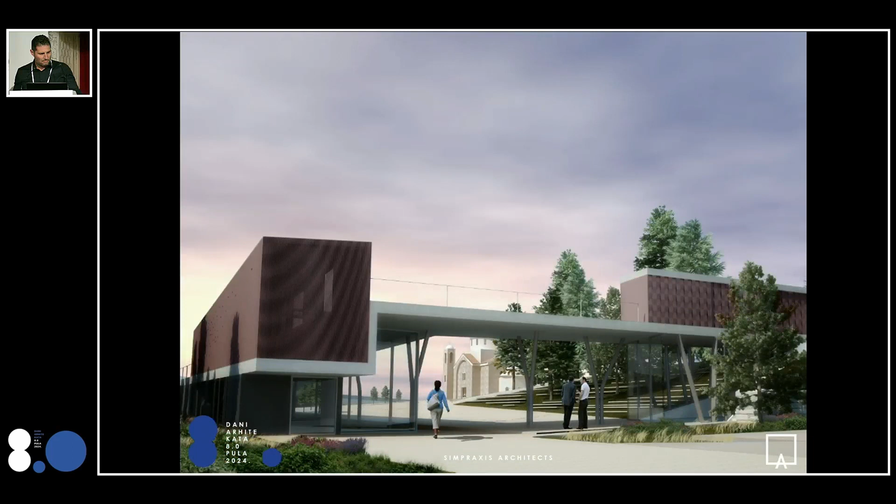This is some competitions we won.

So what's the role of the architect? I think we can stay here and discuss for days, and maybe we'll not be able to analyze it and define it.

Simply, I would say that the architect should be the maestro, the coordinator of a project. Everything should go through him, with all the specializations that exist today. We cannot know everything, it's impossible, but what we can do is coordinate the specialists.

We've seen so many interesting presentations from the sponsors about doors, about lighting. Our role is to coordinate these people and use them in a good way to get the maximum of their knowledge, their know-how, and incorporate it into a big puzzle, which is the project.

The way we manage these people, all this knowledge coming together, it's going to be an interesting result. So the architect should hold the role of the maestro.

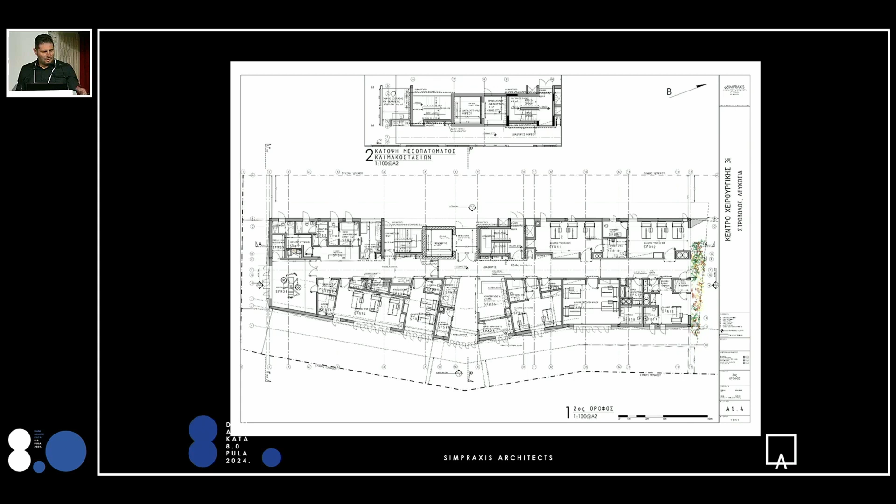So we did all the basic drawings, all the discussions with the authorities, and we prepared, negotiated, and applied for all the necessary permissions. It's a lot of bureaucracy, especially for medical buildings in Cyprus. You have to get a license from the Ministry of Health, then go back to have all the electromechanical done, then apply for the planning permissions, go through the fire brigade, the municipalities, environmental departments. It was a lot of bureaucratic back and forth.

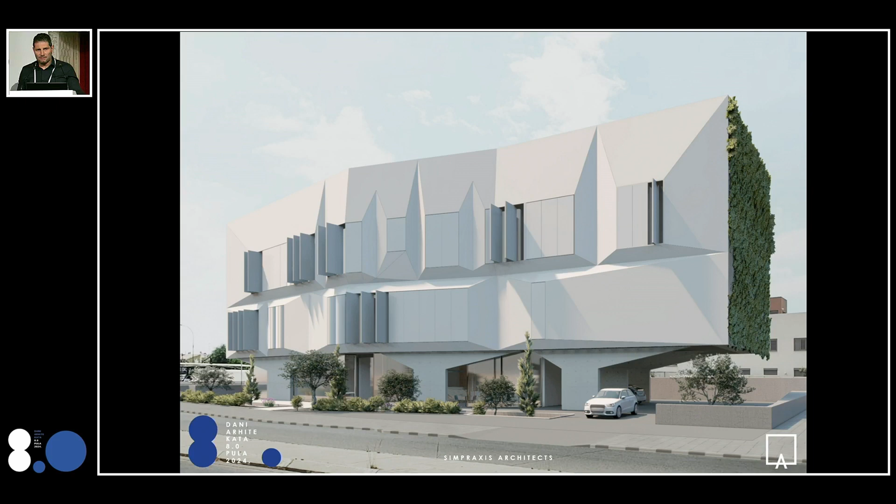In the end, we created the images and some promotional information for the client. The project was on hold for about a year until we got all the permissions and until an investor would come in.

As soon as the project was mature and attractive, we found an investor. The client found an investor through some of the big five audit firms, I think it was Coopers and Lybrand, and they helped him find an investor. A medical fund was created, and then we got the go-ahead to proceed with the detail and tender drawings.

Our role there was to coordinate all the consultants. We had to get back all the consultants' drawings and specifications and incorporate them into our drawings, making sure there were no conflicts.

As I said before, we did the design concept and all the detailed drawings. We coordinated and negotiated and acquired all the permissions, and we prepared with the QS the bill of quantities and went out on tender. In Cyprus, I have to mention that we use the British system, the construction law and the British system, so we have quantity surveyors, we have bills of quantities, and we go out on tender with that.

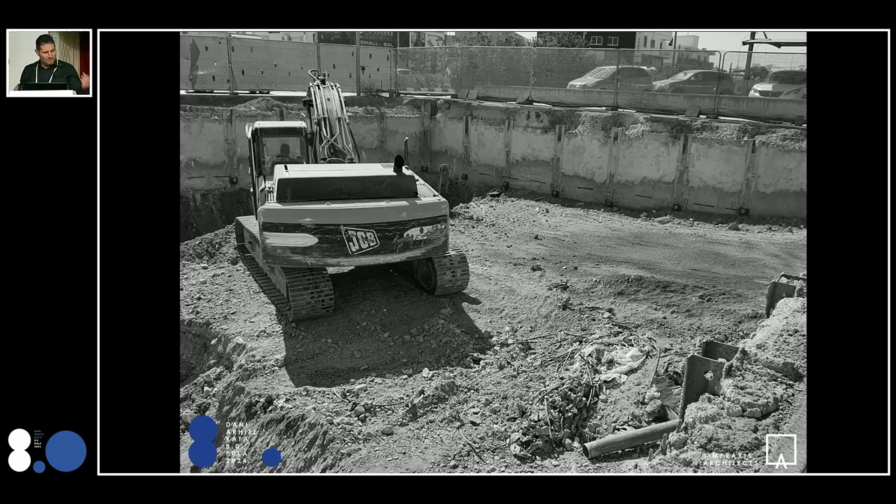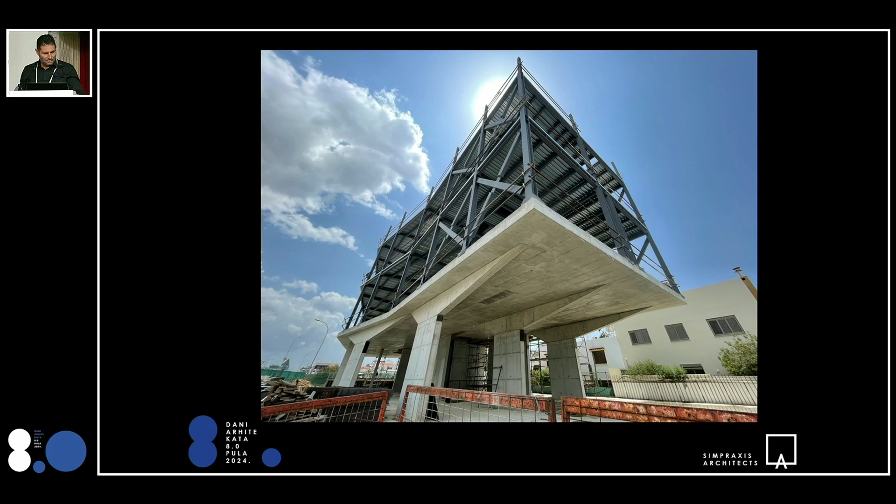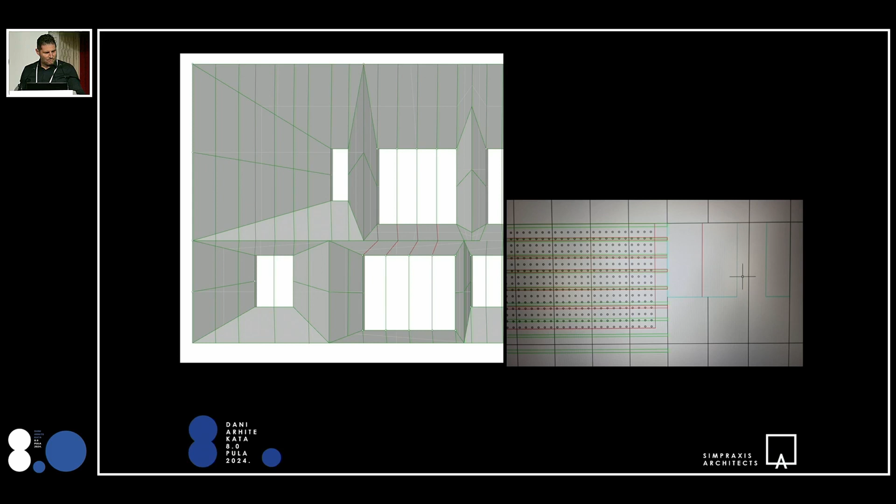These are some photos during the structure erection. The building is concrete up to the ground floor, and then it's a steel structure. This is some drawings we did with studies for the facades, and this is the back facade of the building. We used HPL, high pressure laminate, from Abet Laminati, an Italian brand.

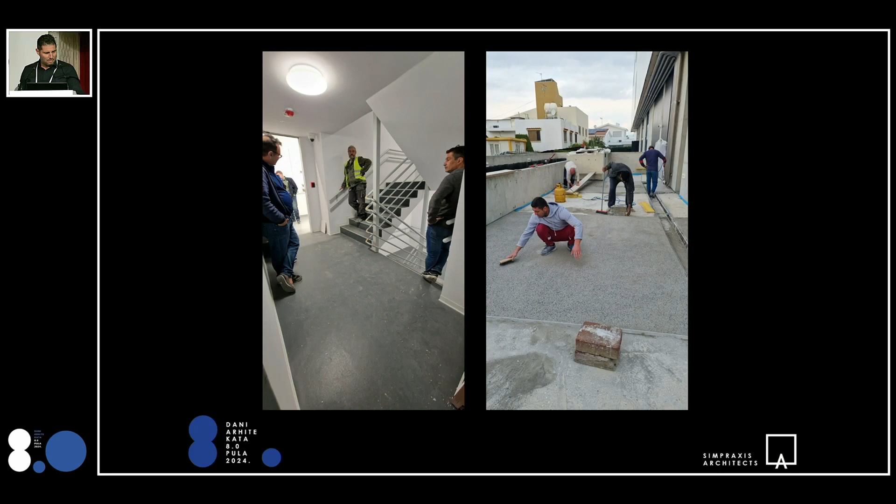Okay. So I just missed it. It's not changing. Yeah, oh, okay.

I'll just highlight some main points on the private projects. We use a different contract, as I said before, the JCT. On private contracts, architects can specify brands and specific materials. I was listening before to some of the sponsors talking about specifications.

It's a completely different ballgame doing a public building versus a private building. You have the flexibility in a private building to do changes, subject to being in budget, and you can justify the changes at any point - you can go ahead and do that. The architect should coordinate the whole team of consultants, and all the contract administration is through the architect.

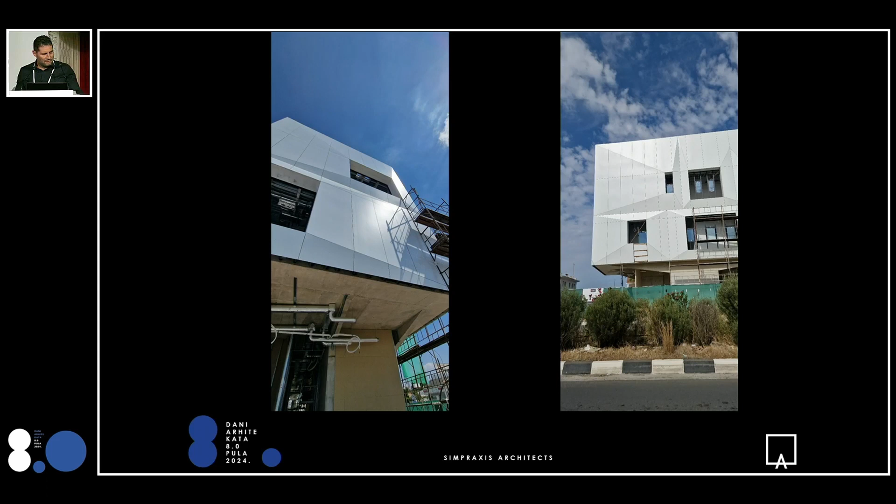This is some photos from during the construction phase. And this is a photo of the building with all these openings there. We had them, it was before the installation of the fins, which, the end result is like this.

Everything closes. It's a daycare unit, so basically it closes at 5, 6 o'clock in the afternoon and opens up the next morning. It was a niche market. It's a very high-end OR, operation rooms, for surgeries like plastic surgeries, ophthalmology cases, orthopedic cases that you can do in the morning and then go home in the evening.

So we wanted the facade to show this, to be able to close off. The whole building can close off in the evening, and this is with the fins open.

Okay, now I'm going to move to the public building. It was a competition. Paphos is a city, as I said before, it's a city on the west coast of Cyprus. It was the cultural city of Europe in 2017.

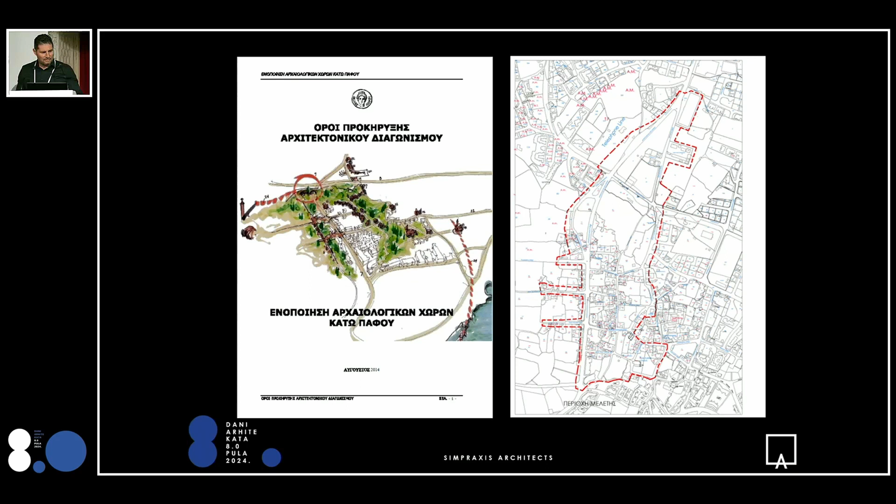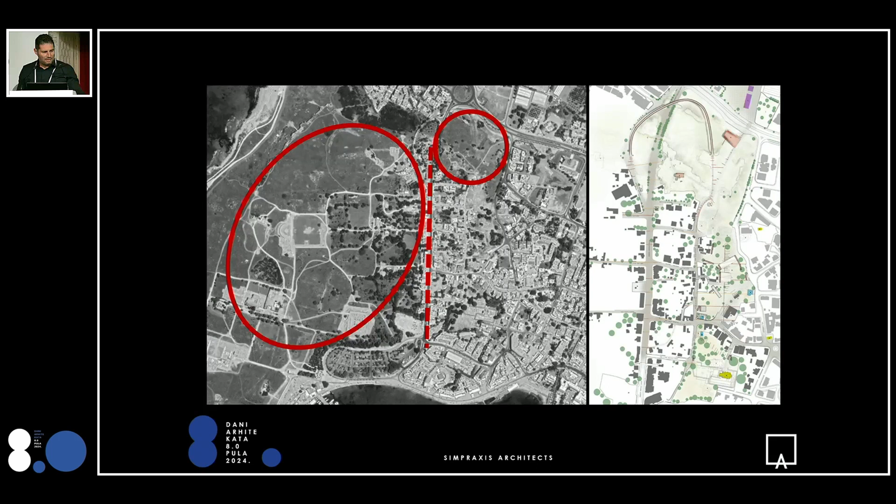The area is a big area, a big urban site in the city of Paphos. And in the circle is the two archaeological main parts, and the dotted line is the main road now dividing this archaeological site. So we came up with the idea of creating a loop.

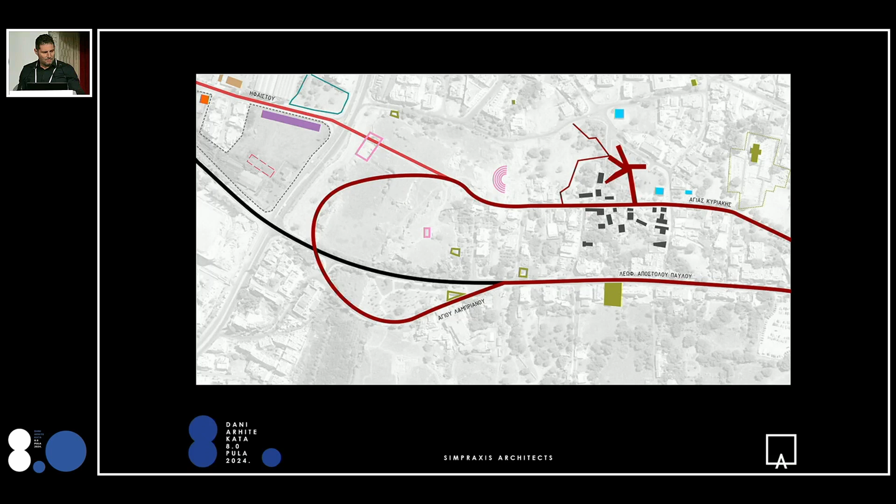As you can see, we created a loop to join this site again. And it was also, the brief called for some hard landscaping, some facilities to use like exhibition centers and resting places and spaces, etc.

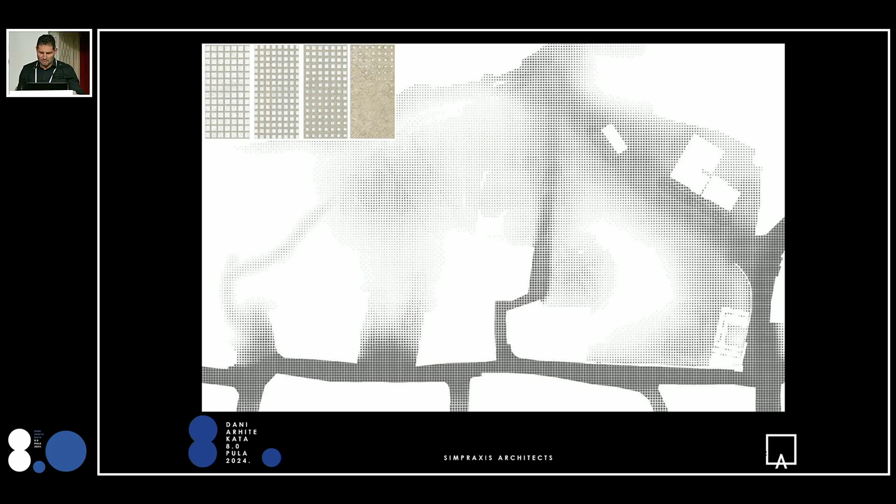So talking about our role here, the brief was ready before. We didn't have any involvement in the brief, just to compare with the private project. And as soon as we won the competition, we were appointed as the architects. Those are some images from the competition phase.

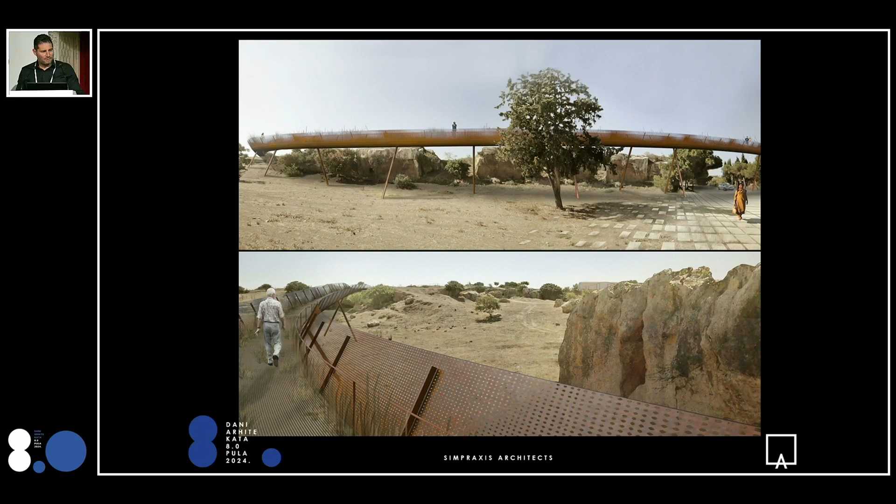We were appointed as architects by the municipality, and the structure compared to the private project was that the client, the municipality of Paphos, signed a contract with us, and then we had all the consultants under our belt, so they had no direct contact with them. So legally, we were responsible for their work.

At the same time, we had a relationship with the Department of Antiquities because it was an archaeological site, so we had many issues to face and many discussions with them in order to avoid possible delays during the construction period, because those delays would also lead to claims by the contractors and delays of the project. As I mentioned before, it was part of the cultural city of Paphos, so it was a project co-funded by the European Union as well, so we had some time limitations for the funding.

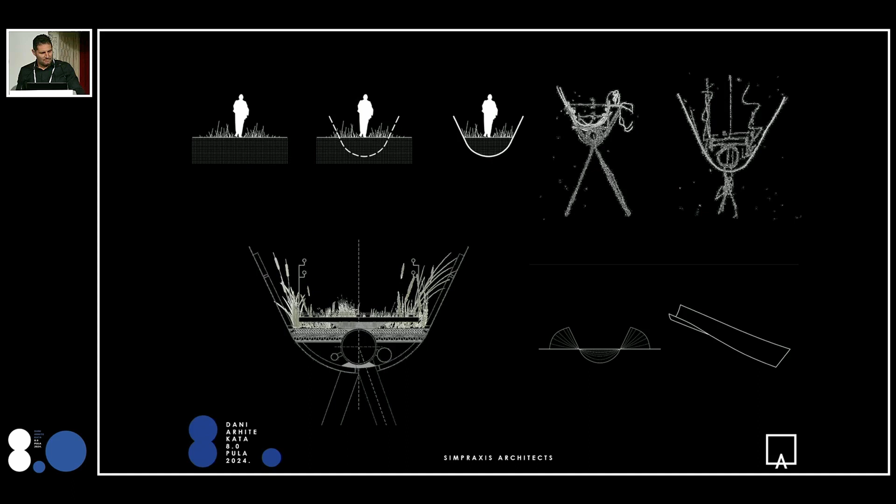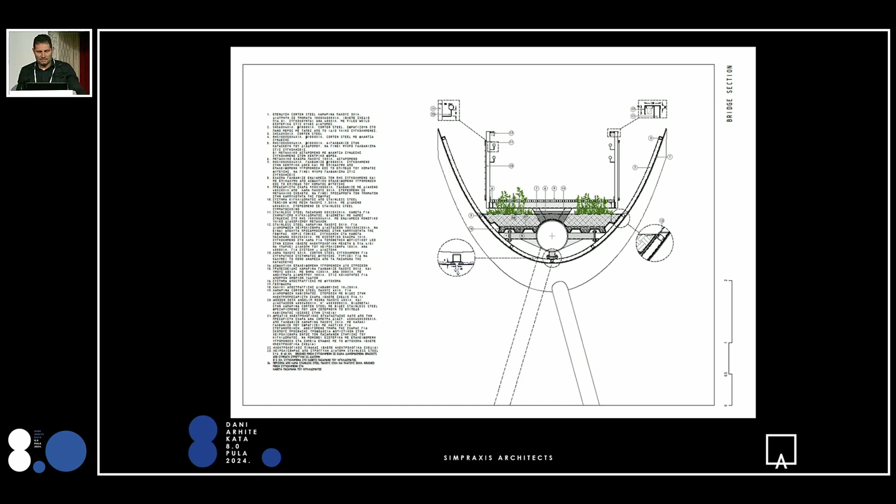These are some sketches from the competition phase, and I'm just going to go through. This is the bridge that connects and unifies the archaeological site, and this is the stage of tender drawings, of the detailed drawing. Because the bridge opens up at the end and at the beginning, we had to show how it works, so we had cross sections every meter, every half a meter.

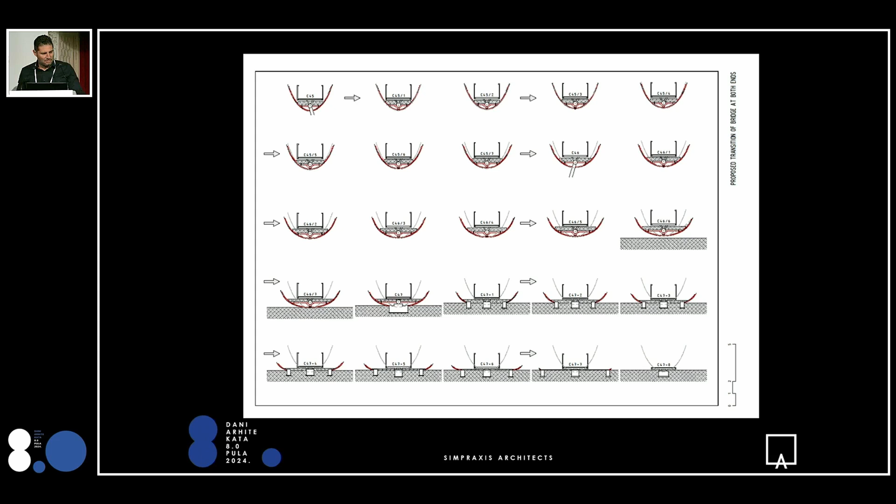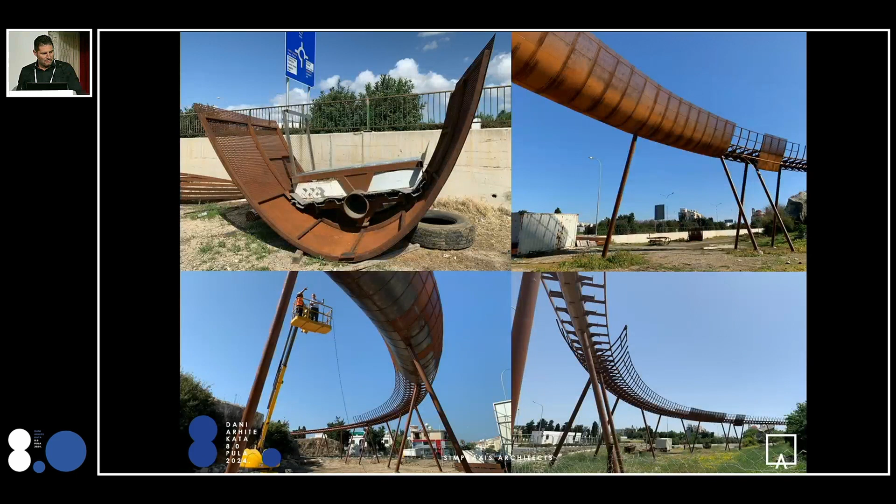These are some working drawings again, and this is a sample. I wanted to show the procedure from concept design and sketches to the detailed technical drawing, going up on site and having samples constructed for approval.

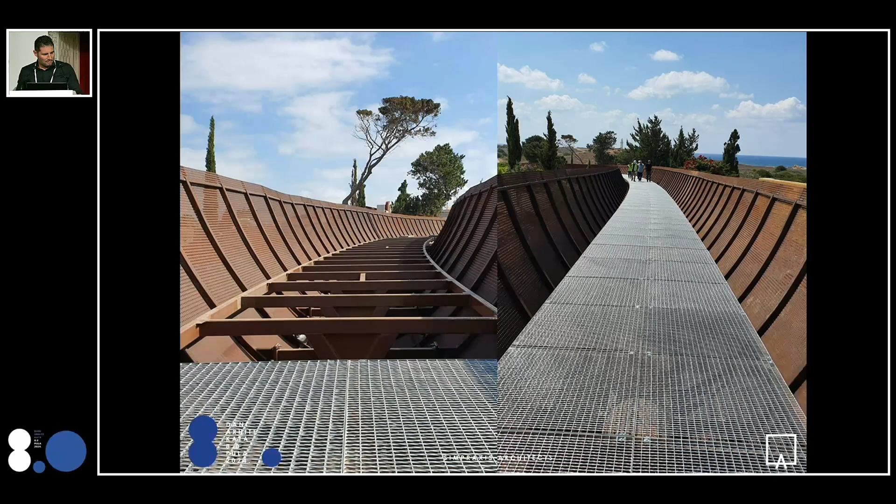This bridge is supposed to have soil and transfer the flora, to let the flora and fauna travel freely underneath, and it's Corten steel. This is also during the phase of construction, and there are some photos during the construction period where we had to approve samples. We had to be on site almost every week.

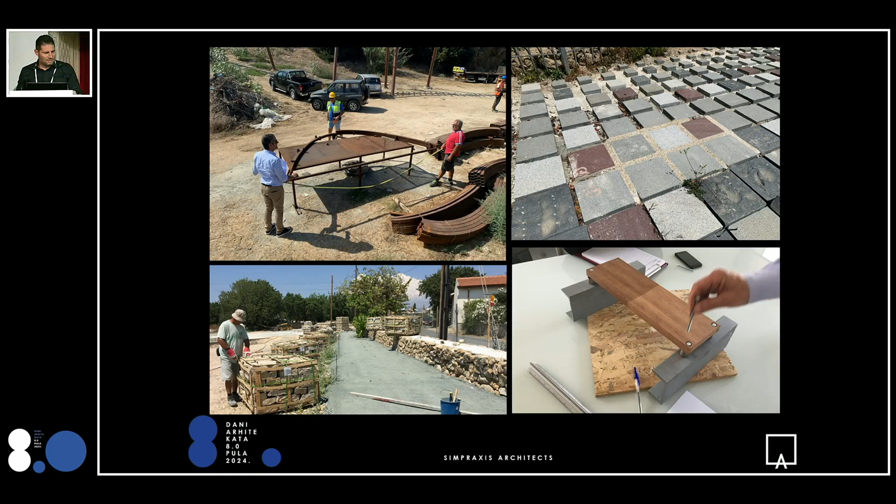And this is the start of the bridge, the beginning of this bridge, being used by the public.

Okay, this is a bridge, and I would like to highlight now and point out the column system. This is something we came up with the structural engineer, because, as I mentioned before, it's an archaeological site. So to avoid any problems, we created a bit of a random grid of columns, and we did some drilling before the contractor was even on site, with the municipality. We highlighted the exact points of the foundation of each column to make sure that we didn't have any archaeological remains.

And the way we designed the columns with the structural engineer, we could just shift the columns a bit back and forth, so in case there were any archaeological remains, we could avoid them. In some cases this was done. I'm just saying this to highlight the role of the architect—they have to be proactive in many cases and think ahead.

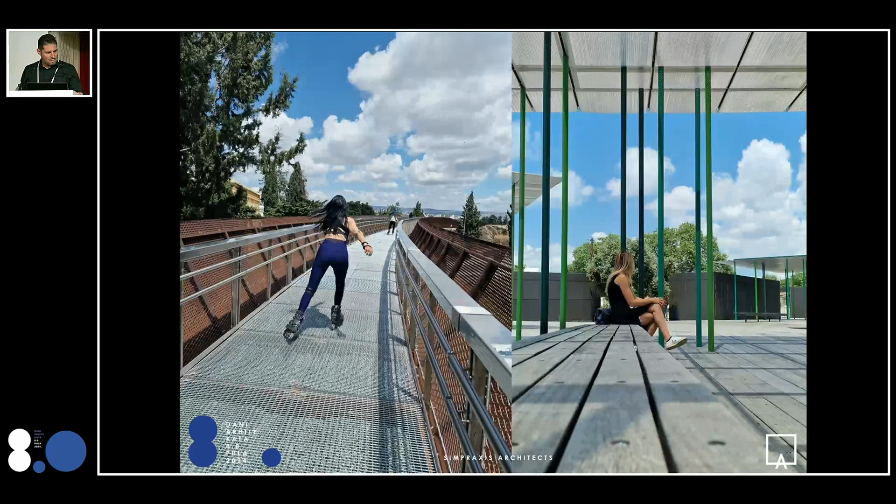On the right-hand side of the photo is a covered area for some exhibition, a small cafeteria, some playing grounds, because it's a big urban archaeological park—it's not only the bridge. We also used materials that can be reversed, that we can take out, and we couldn't use lots of concrete.

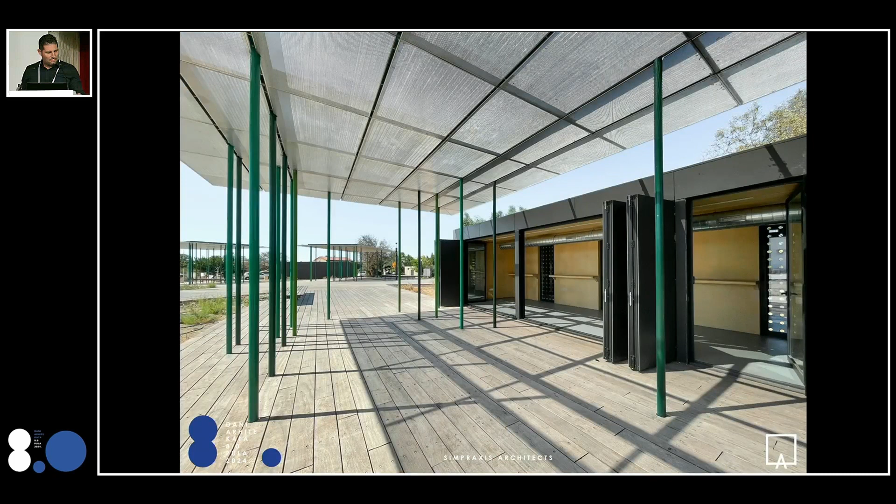So the architect's real scope of work is to be the heart and the soul of any given project. In our case, I think every time we leave behind a piece of our soul, but it's always replaced by the satisfaction we get out of the creative process and the end result.